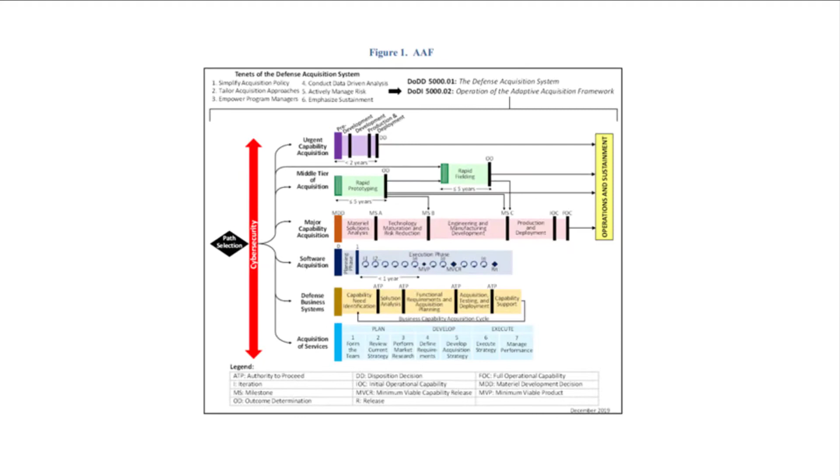In accordance with the DoD's Instruction 5000.02 for the operation of the Adaptive Acquisition Framework, across all 5 phases of this major defense acquisition program, the 3D Experience platform delivers a strong multi-strand unbreakable digital thread that enables traceability forward and backward to the requirements and trade-offs made throughout the life of the program's assets, across all engineering domains, now and for decades into the future.

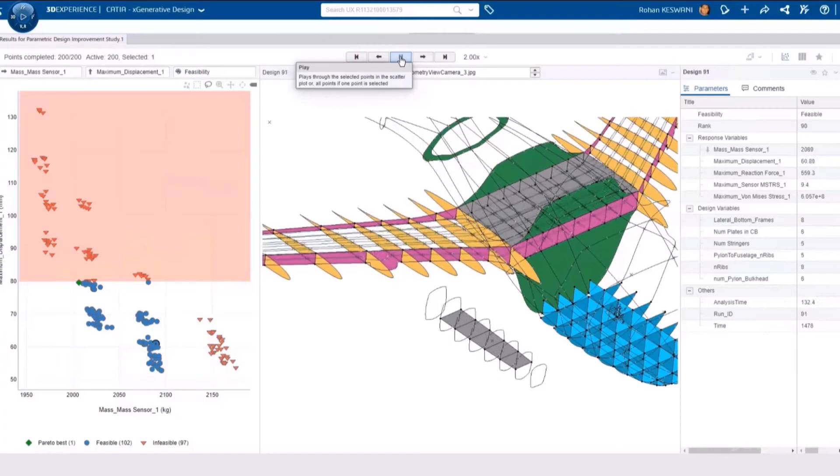A model-driven environment for every phase of the program. A virtual verification and validation platform that lets program managers use the latest physics-based simulation models to virtually simulate designs and processes, to discover issues in the virtual world before they become time-consuming and very expensive to address once they're in the physical world. An open environment that allows you to work across a family of systems, even extending legacy systems where necessary to interoperate with the latest tools.

All this on a single object-oriented integrated data model that provides the authoritative source of truth at the center of the DoD's digital strategy. Let's take a look at our eVTOL example and see how the 3D Experience platform provides the competitive edge the program needs.

In the materiel solution analysis phase of this major defense acquisition program, the program office will select the most promising technology that will address the unmet needs. Here, the Program Executive Officer, or PEO, receives the initial capability document from the JCIDS process.

As the team grows, everyone has access to a single, secure, real-time, authoritative source of truth, no matter where they're located. The various missions, seen here on the mission cards and documented in the ICD, will help guide every phase of the acquisition program. The PEO manages every aspect of the program: schedule, cost, risk, resources, and technology development, all from a dashboard on the 3D Experience platform.

Right from the outset, mission-driven stakeholder requirements are expressed as models and captured in the platform, and will feed the system requirements and the physical requirements, which guide all the analyses of alternatives and associated technical measures of evaluation. On the 3D Experience platform, there is complete traceability between user requirements, the use cases, the concept definition, the high-level system requirements, and beyond.

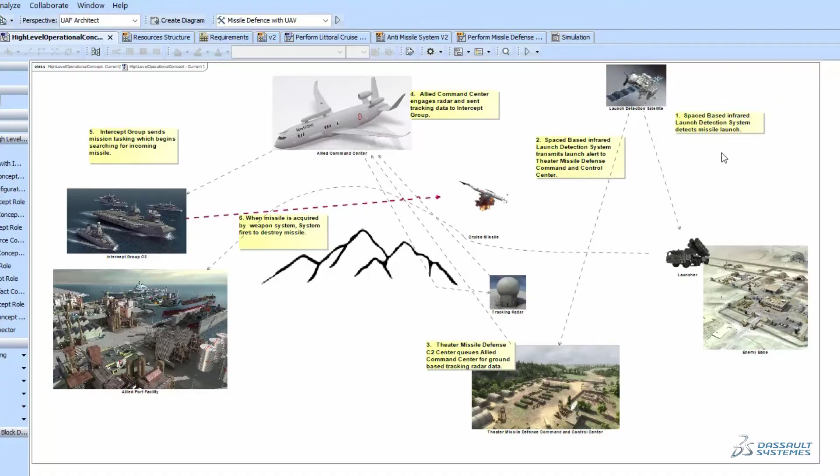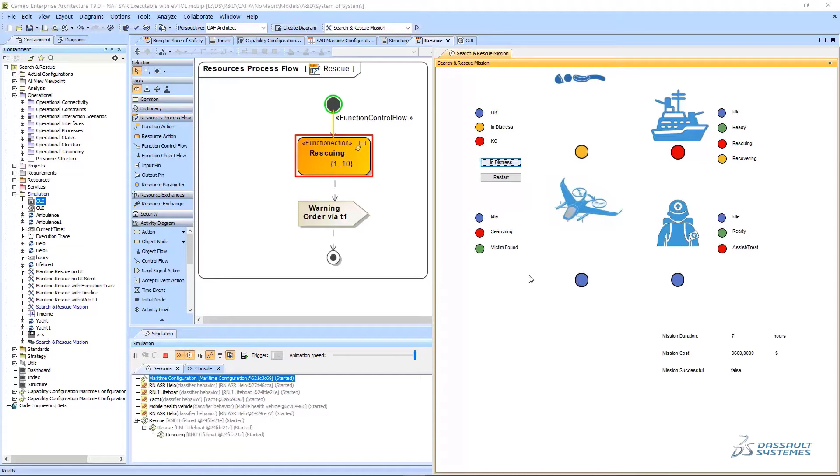No Magic Cameo and CATIA Magic provide state-of-the-art capabilities to model the mission with a model-based systems engineering methodology. This portfolio provides the best-in-class unified architecture framework implementation using the industry-standard SysML language. This enables the basics of mission modeling and simulation. But operational and functional simulation are not enough to fully analyze the mission. To do so requires multi-physics and multi-scale simulation.

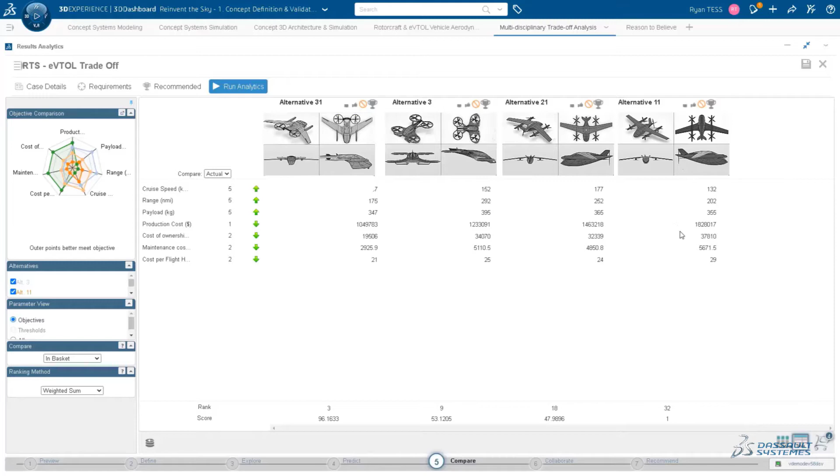As the mission is being analyzed, some concepts of operations are being identified. In parallel, multiple systems of systems and systems alternatives are also being considered. The multi-discipline and multi-scale trade-off analysis capabilities of the platform allow the team to explore millions of options and configurations, to find the best winning concept and validate the system's requirements. This is essential to develop a consistent and sustainable family of systems and the related systems of systems, with a strong level of performance and interoperability.

As the team enters the technology maturation and risk reduction (TMRR) phase, the abstract conceptual systems architecture identified in the previous phase informs the development of the preliminary systems design for the 3 mission variants of the eVTOL. To enable the bidders on this program to benefit from all the modeling work done to date, the RFP is issued in the form of models for each of the mission variants, saving time for the program office and providing for a more robust RFP.

As the 3 OEMs respond to the RFP with different proposed configurations, the program office evaluates each option against their assessment of functionality, cost, schedule, and risk, always tying back to requirements at all levels.

The 3DEXPERIENCE platform allows the program office to make their selection with confidence they've made the best choice. Once the prime contractor is awarded, the program office refines the schedule, and the digital thread that started at the very beginning extends unbroken into this phase of the project. Let's take a closer look at how the 3DEXPERIENCE platform was used in the TMRR phase.

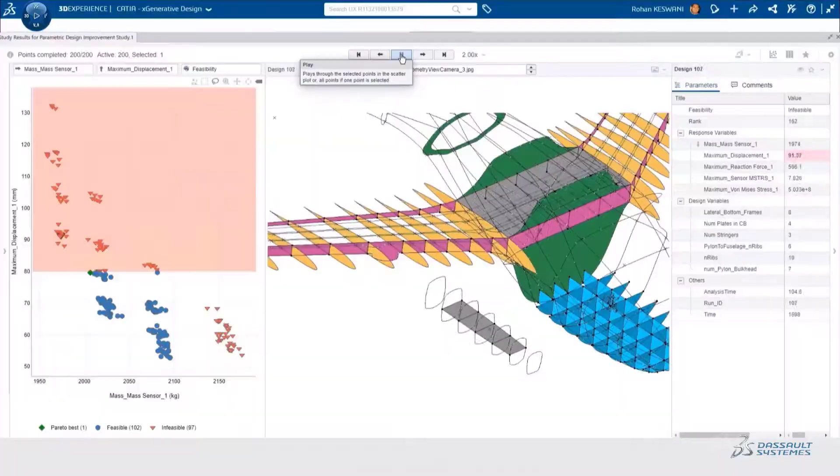The 3D virtual twin is a language for all. The virtual twin experience helps all stakeholders share ideas and resolve issues collaboratively. We are smoothly transitioning from a program office perspective to a prime contractor's perspective. The boundaries between the two organizations fade away to streamline the two-way collaboration.

As the system is conceived, it's critical to assess in real time how well the requirements have been met through the complete requirement chain from mission to implementation. The 3DEXPERIENCE platform also provides capabilities to visualize, navigate, and flag a wide spectrum of systems engineering models, including those from third parties. The platform is open and provides a way to bring additional third-party capabilities into the system.

At any point in the design and implementation process, it's possible to reassess the system's ability to realize the missions. This real-time, closed-loop feedback between the program office and its suppliers minimizes the risk of missing any of the mission objectives and requirements.

Continuing the model-based approach, the OEM's engineers work on the detailed physical system designs, creating a digital twin of the eVTOL. This digital twin is just part of the virtual experience twin that will serve both the OEM and the program office throughout the rest of the program and into sustainment. This virtual experience twin encompasses the product twin, the production twin, and the operations and support twin to provide a complete virtual representation of all aspects of the life of this asset.

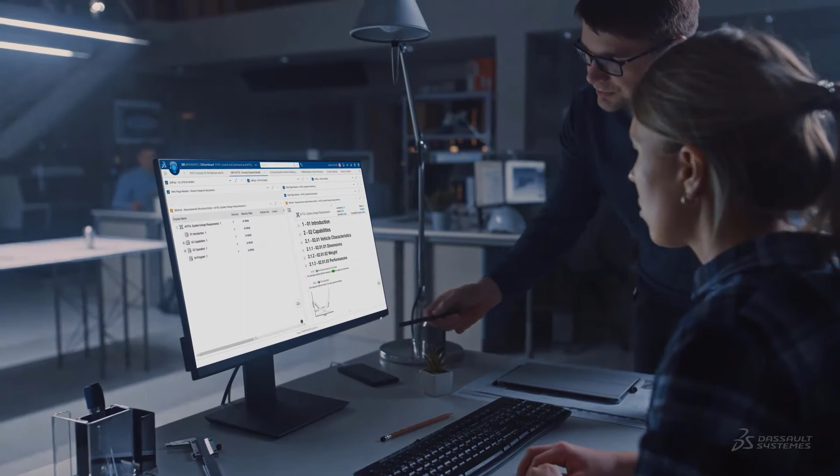Let's see how this engineering and manufacturing development phase was conducted on the 3DEXPERIENCE platform. The ability to deliver the right level of mission performance is not only about the design and engineering of the eVTOL, it is also about production and sustainment. The 3DEXPERIENCE platform provides leading-edge capabilities to model the manufacturing systems at any scale, from tools to supply chain, using industry-proven model-based systems engineering and 3D modeling techniques.

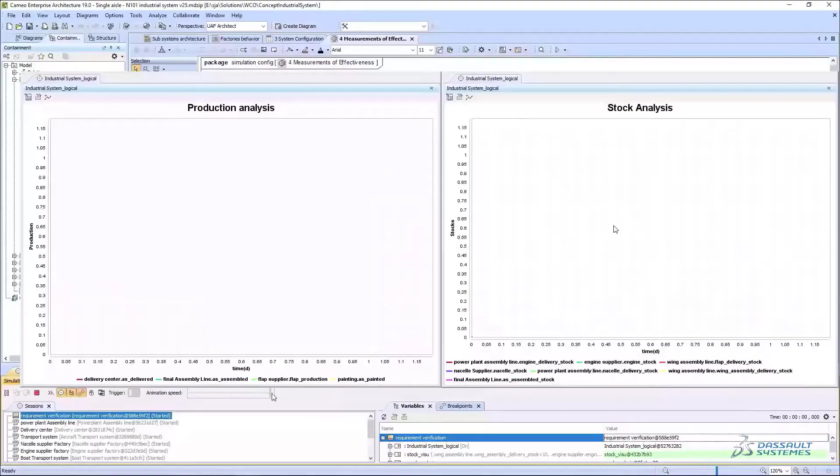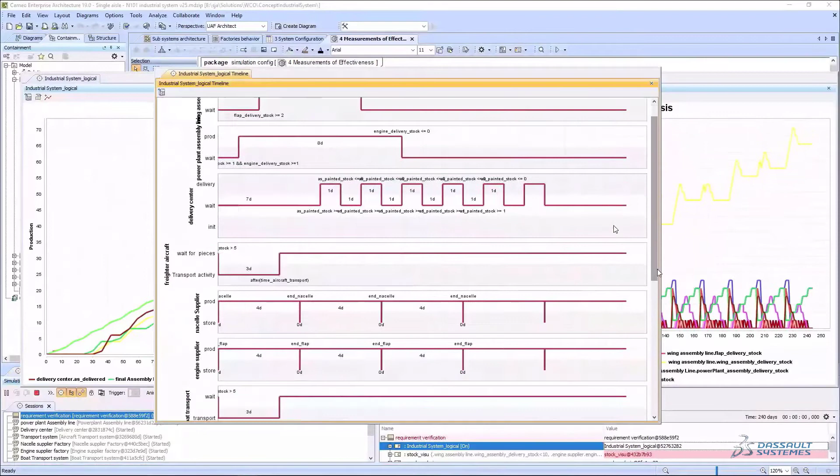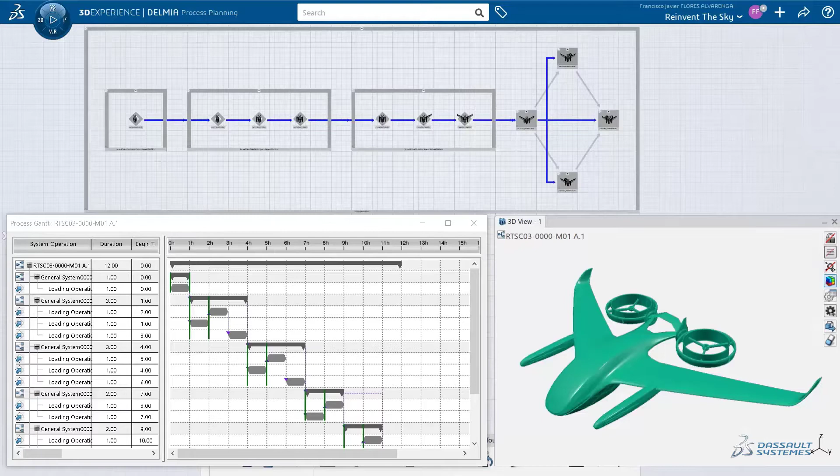We start with a view of the end-to-end supply chain to understand who supplies what to whom and at what capacity. The 1D to 3D digital manufacturing simulations allow the prime contractor and the subcontractors to accurately model the manufacturing processes, from stock analysis to full production line analyses. This visibility across the ecosystem will allow them to anticipate problems, optimize scheduling, and dramatically shorten the time to production readiness review. The real-time virtual twin of the eVTOL is available in the production planning process, facilitating collaboration in context between the engineering and manufacturing teams.

The single authoritative source of truth and the digital thread on the platform continue to inform the development of production planning, maintenance planning, and flight simulation training, so that all these deliverables are based on the most recent designs, with explicit traceable links to their underlying requirements.

Output from the low-rate initial production is tested against the systems models and requirements. The platform enables ongoing collaboration across all the teams, both OEM and program office, to address issues found in the initial production units. As the program progresses and team members move on, the institutional knowledge is preserved on the platform.

When full-rate production begins, the program office and the OEM can track production and deployment on a global scale. As the first units are produced, they go into the next phase of operations and support, while the OEM continues to deliver with quality against the program orders. Let's take a look at the production planning on the 3DEXPERIENCE platform.

Here we've modeled the full supply chain with real-time data from each supplier to understand the global fulfillment capacity. The system indicates a need to add suppliers for metal and materials. On the 3DEXPERIENCE platform, the OEM's team can identify the best sourcing and production alternatives to address the anticipated shortfall.

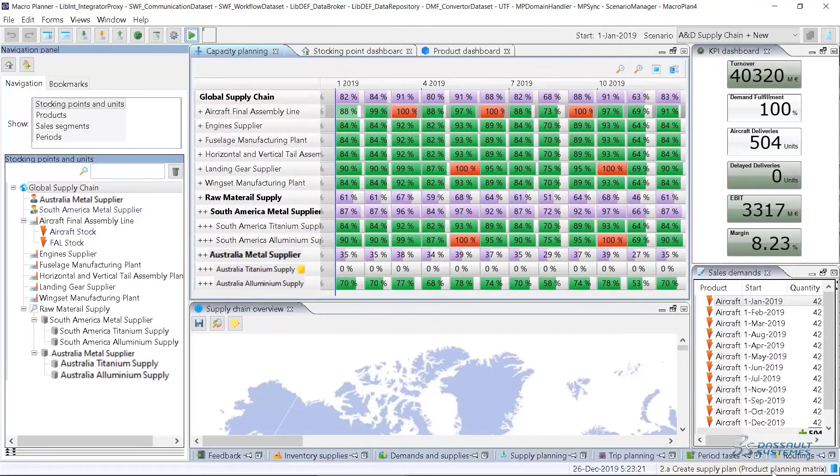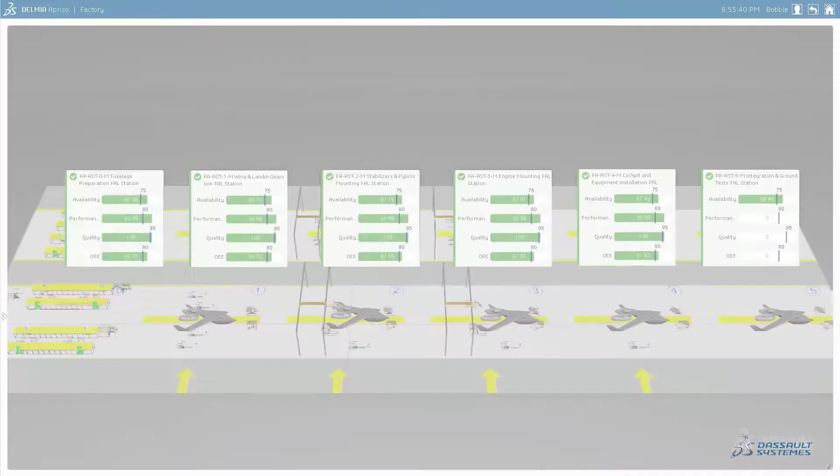From the overall supply chain, we now take a look at the individual assembly operations. Here, the production manager can easily evaluate the real-time performance of each station from his dashboard connected to the industrial Internet of Things.

He can anticipate when scheduled maintenance may impact production. And when a defect is detected in a unit coming through the assembly process, he can assign a resource to address that production defect.

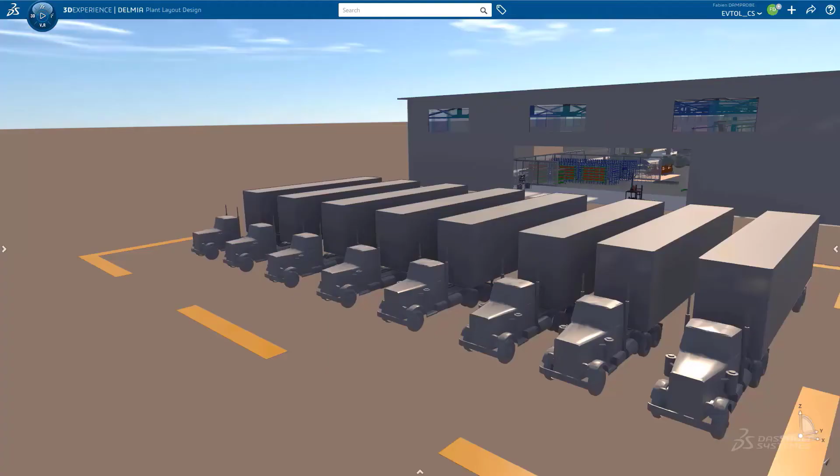The virtual twin of the factory helps visualize the production sequencing and the flow of materials on the shop floor and in the warehouse. From the receiving area, we proceed through the robotic assembly of the rotors, past the assembly area where more of the components come together, past final assembly, on into the paint shop and quality inspection. From there, the eVTOLs will be transported to an off-site testing area.

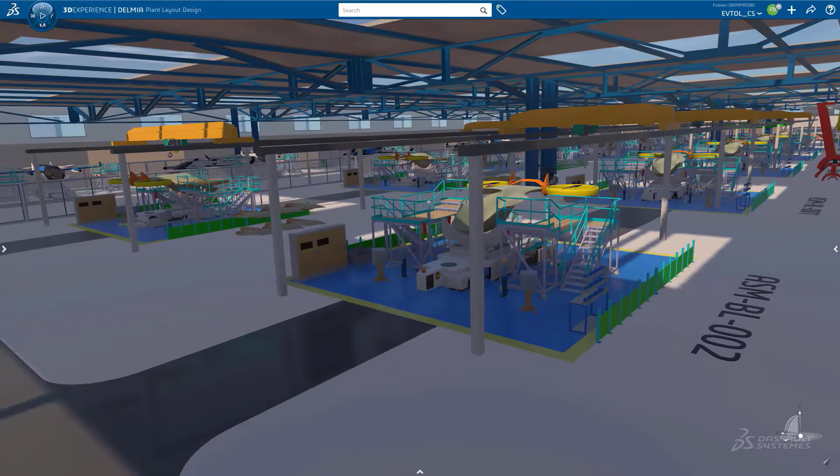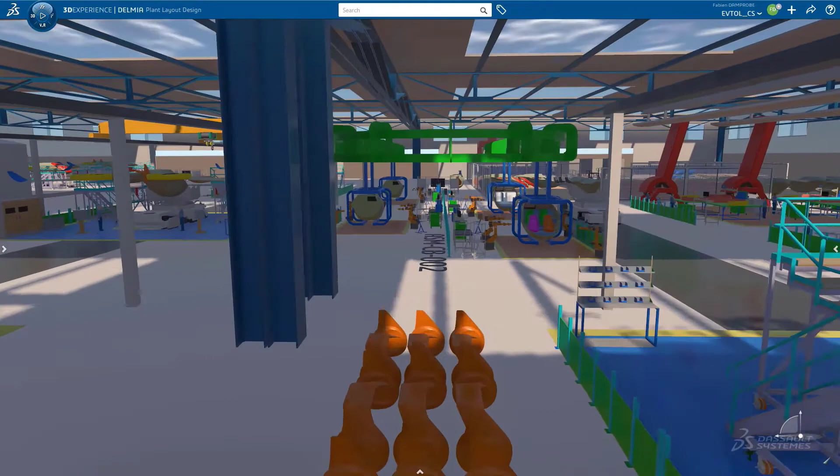With this virtual twin, all aspects of production can be studied and optimized up front, before the real-world plant is set up. The virtual twin of the product and its industrial system is also a valuable asset in developing training for the plant staff well in advance of their first shift.

The virtual twin of the factory, validated and verified with virtual commissioning, increases the level of maturity and quality during the low-rate initial production. With the final assembly machine down for corrective maintenance, the production manager must find a way to minimize disruption to the production schedule.

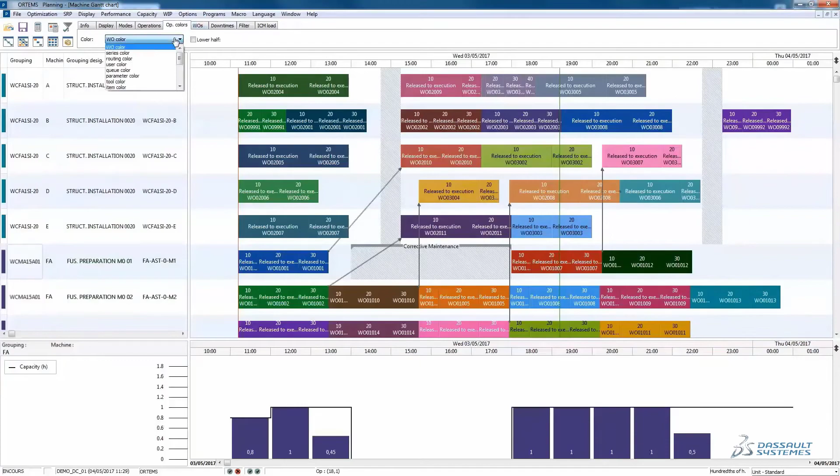With the 3D Experience platform, he can run manufacturing simulations to find the optimal workaround and reorder the lines so production rates are minimally impacted.

Once in operation, the eVTOL is used in unexpected ways. The predictive algorithms on the platform trigger an intervention in the field. They foresee a problem with the opening mechanism for the forward rotor, a problem that may be likely to occur before the next scheduled maintenance. The nearest field depot can schedule maintenance before the problem is realized in flight.

Let's see the 3D Experience platform used in the operations and support phase.

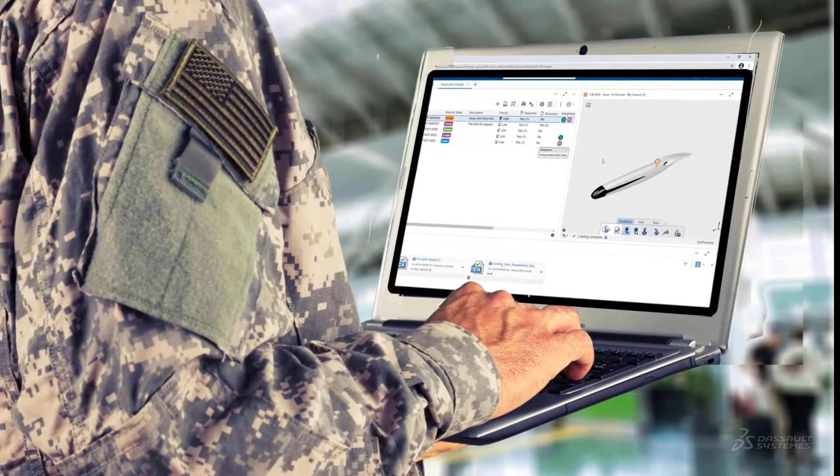As the eVTOL system is now in operation, it's critical to optimize the fleet availability. And for these eVTOLs, that responsibility falls to the aircraft mechanics in the field. In our example, there's an issue with the opening mechanism of the forward rotor.

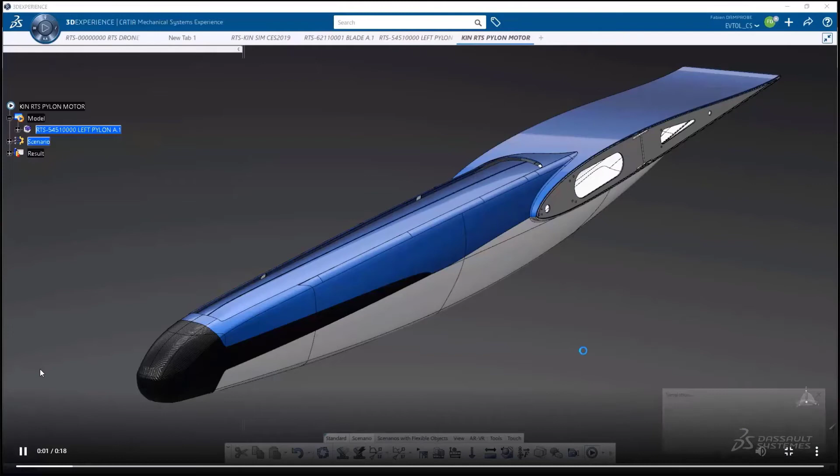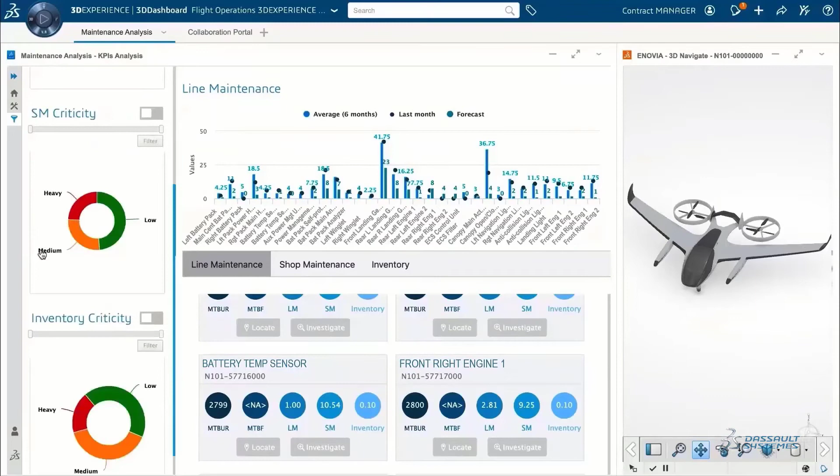Onboard sensor data and usage information for each eVTOL are collected and provide a rich cache of big data that can be mined to understand system performance and reliability. The use of data science with advanced artificial intelligence technologies on the 3DEXPERIENCE platform can provide predictive analytics that dramatically improve fleet availability. The actual field usage data can be combined with the system virtual twin on the platform.

Both the 3D models and 2D logical and functional designs put all the necessary information at the fingertips of the mechanics in the field.

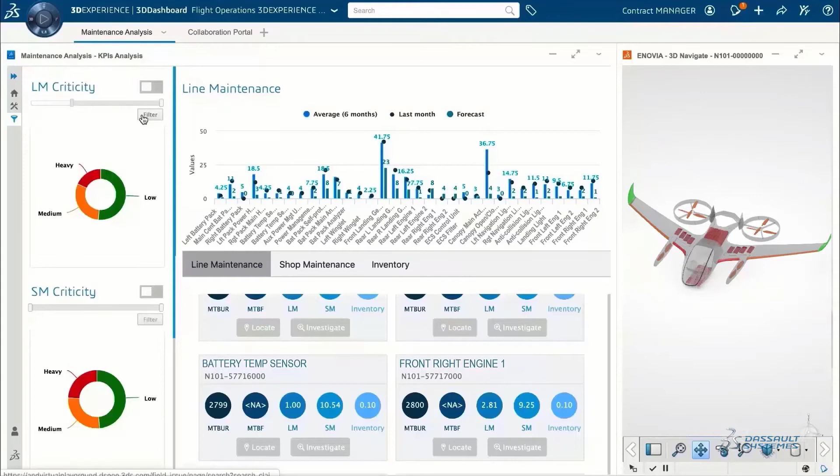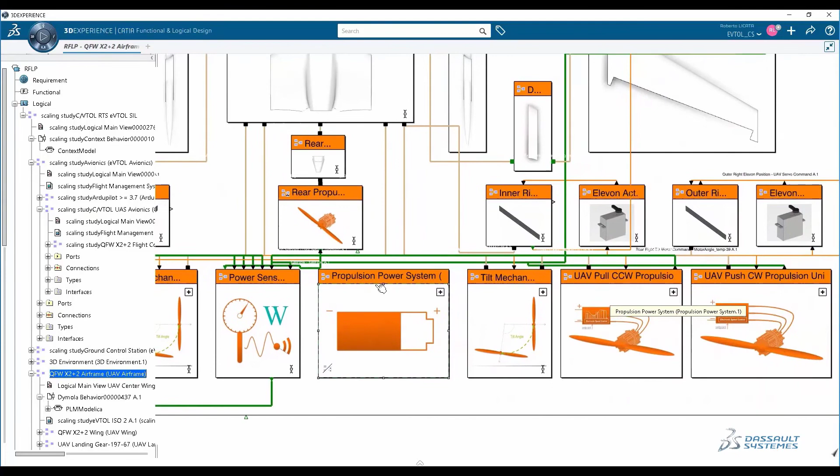The full virtual twin built with this model-based acquisition process provides holistic impact analysis. It greatly simplifies the introduction of enhancements to further improve the quality and performance of the eVTOL over time.

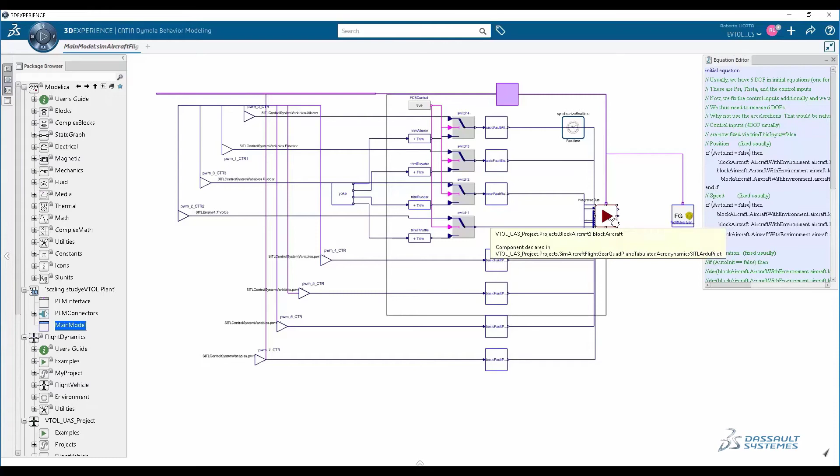The end-to-end traceability of the digital thread across all engineering domains streamlines the execution of changes, from systems design to production to maintenance, repair, and overhaul of the eVTOL. Changes that will improve new units to come or retrofits to the existing fleet.

The 3DEXPERIENCE platform enables a complete digital thread, an authoritative source of truth, and a truly model-based lifecycle for this eVTOL or any program asset, from mission needs analysis to optimized fleet availability.

We've seen how the 3DEXPERIENCE platform provides the most comprehensive, integrated, and easy-to-maintain platform to run major acquisition programs. When our troops are giving their everything in defense of our country, we owe it to them to deliver the capabilities that provide clear superiority. They can't settle for anything less, and neither should we.

Don't settle for an innovation platform that delivers only a digital twin. Instead, choose the one that delivers a virtual twin experience, encompassing all aspects of the product across its entire lifecycle. The mission and the operating environment, and the experience of those who depend on the product in carrying out the mission.

Don't settle for a digital thread that's actually a tangle of threads, residing in systems cobbled together with middleware, a thread that can be broken by out-of-sync software upgrades or which can cause program delays as the various pieces must be reconnected with each upgrade. Instead, choose the only platform whose digital thread is rooted in a singular, integrated data model and can't be broken.

Don't settle for a platform that wasn't designed as an integrated whole, where the cost to maintain the platform is an order of magnitude greater. Instead, choose the only platform that is designed as an integrated whole, featuring the most powerful tools while still open to other components, saving you time, money, and keeping your tools on the cutting edge.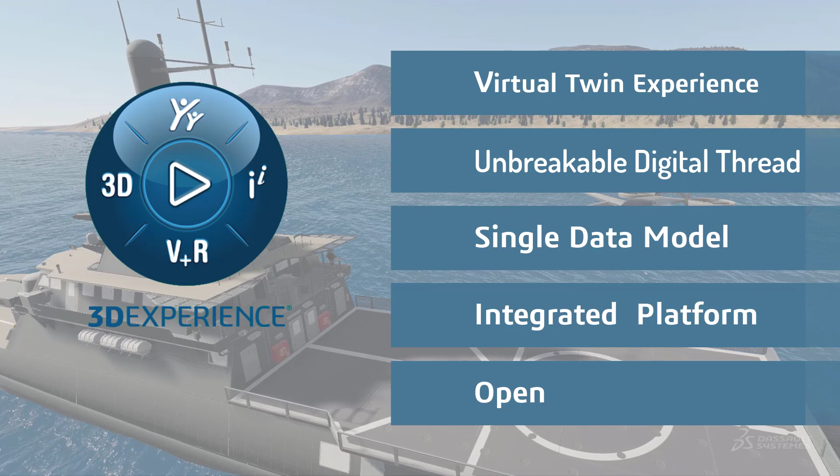Don't settle for yesterday's approach. Instead, embrace the platform selected by the most innovative DoD programs and by the leading innovation companies who have their choice of any solution. They've chosen the 3DEXPERIENCE platform for its ability to afford them greater innovation, speed, agility, and cost reduction. Our troops deserve nothing less.